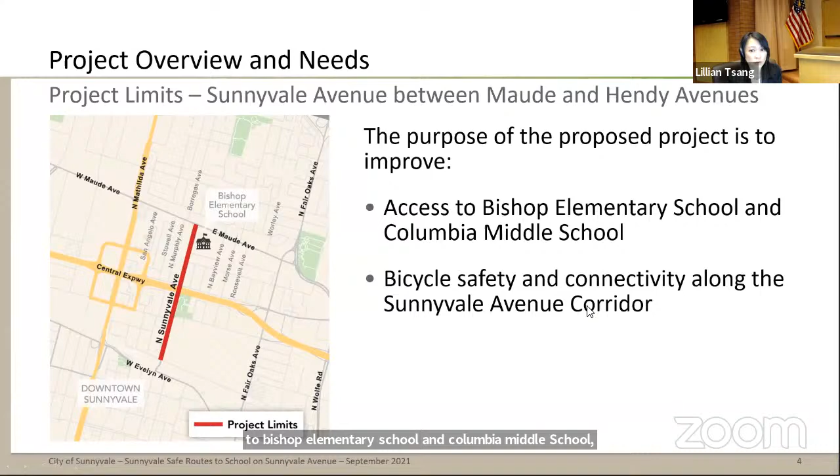This is an important corridor as it provides access to the Moffett Park area and the Bay Trail to the north, downtown and El Camino employment and retail area to the south, and it connects residential areas to Bishop Elementary School and Columbia Middle School.

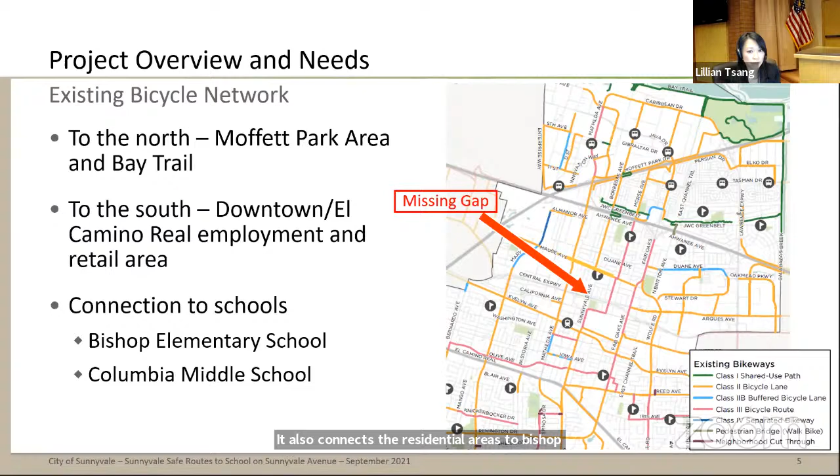As part of the analysis, we also reviewed the existing bicycling usage on Sunnyvale Avenue based on 2019 pre-pandemic data. During the AM and PM peak hours on a typical weekday, there were approximately 100 bicyclists traveling along Sunnyvale Avenue, both during AM peak hour and PM peak hour. Keep in mind that this was the usage observed with no existing bicycle facility on this corridor.

Mathilda Avenue does have an existing bicycle lane, and Fair Oaks Avenue is designated as a Class 3 bicycle route, a signed route where people biking share the road with vehicular traffic. It appears bicyclists choose Sunnyvale Avenue over Mathilda and Fair Oaks because Sunnyvale Avenue has a lower posted speed limit and less vehicular traffic along the corridor. In addition, it has a direct connection to downtown to the south, and there's an overcrossing on Borregas Avenue to the north, providing direct access to the area north of US 101.

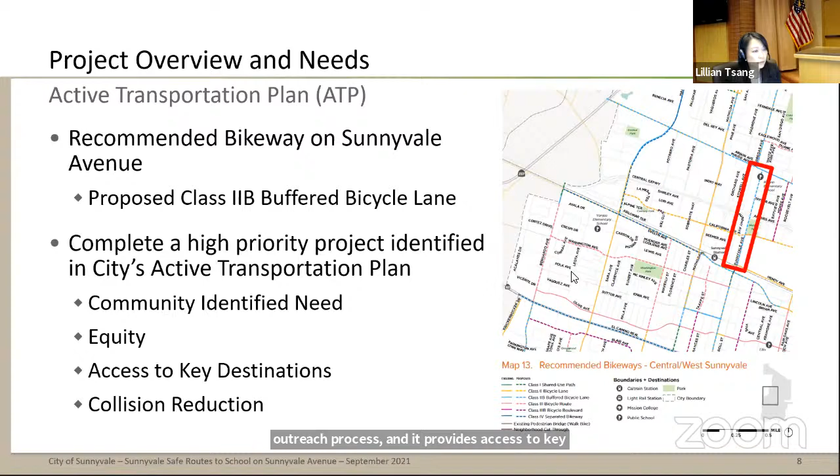A note is that for the segments of Sunnyvale Avenue between Hendy and California, parking is currently prohibited between 6 to 8 a.m. and 4 to 6 p.m. on weekdays. We collected data on 3 different weekdays in February of 2020. On each observation day, we collected data throughout the day at 11 a.m., 3 p.m., 8 p.m., and 1 a.m. to capture on-street parking usage throughout the day.

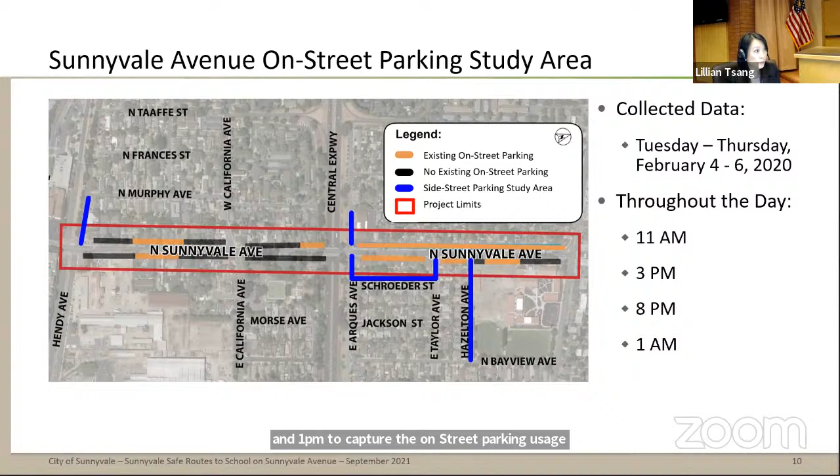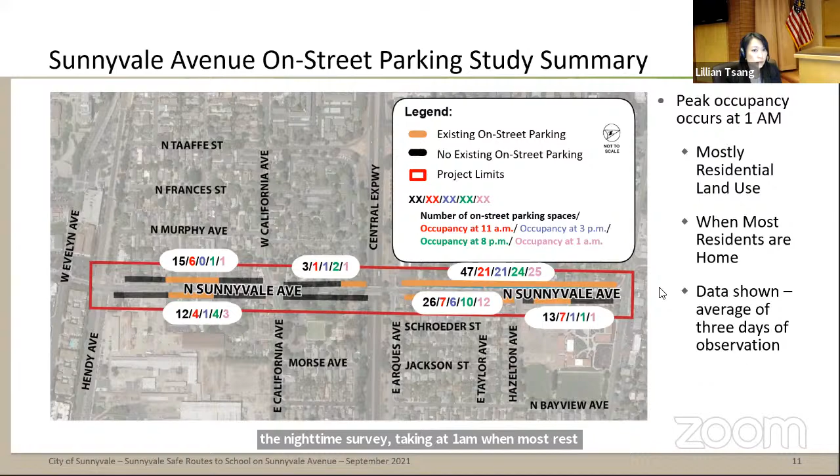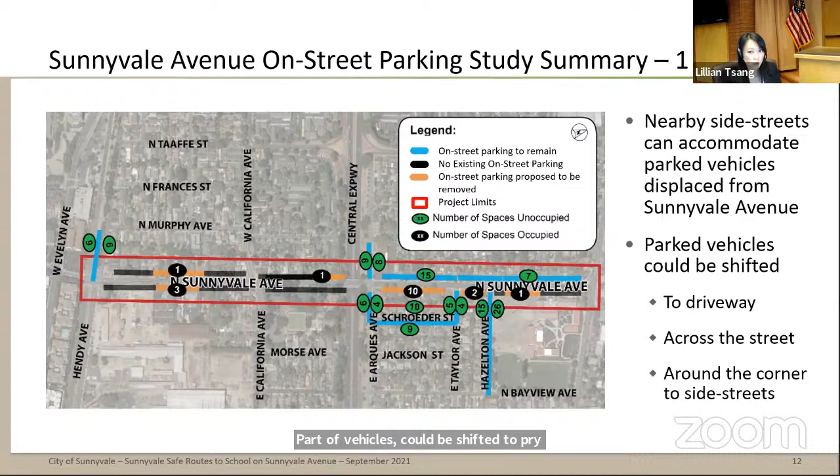The data shows that the nearby side streets and the west side of Sunnyvale Avenue between Arques and Maude Avenue have enough availability to accommodate parked vehicles displaced from Sunnyvale Avenue. Parked vehicles could be shifted to a private driveway across the street or around the corner to the side streets.

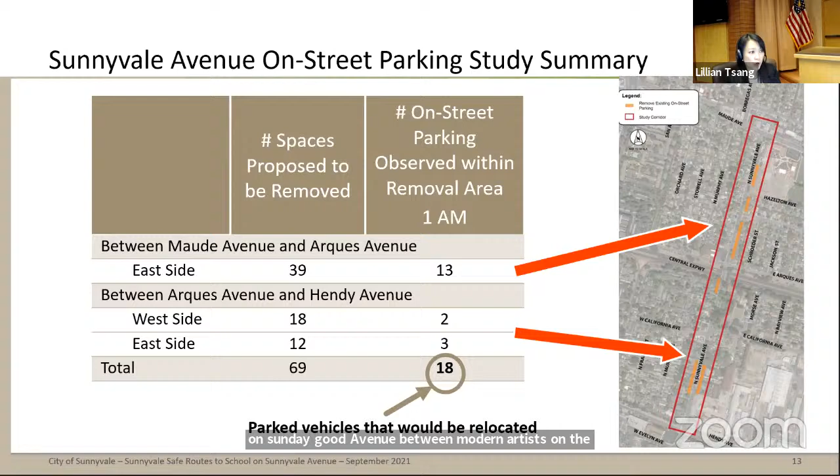Based on the data collected, we're proposing to remove a total of 69 spaces on Sunnyvale Avenue. Based on the data collected, a total of 18 parked vehicles would be impacted and would need to be relocated during the peak period at 1 a.m., of which 13 were observed on Sunnyvale Avenue between Maude and Arques on the northern segment of the project limits, and 5 were observed between Arques and Hendy, the southern segment.

Next, I'm going to present to you the proposed improvements we're envisioning on Sunnyvale Avenue as part of this project.

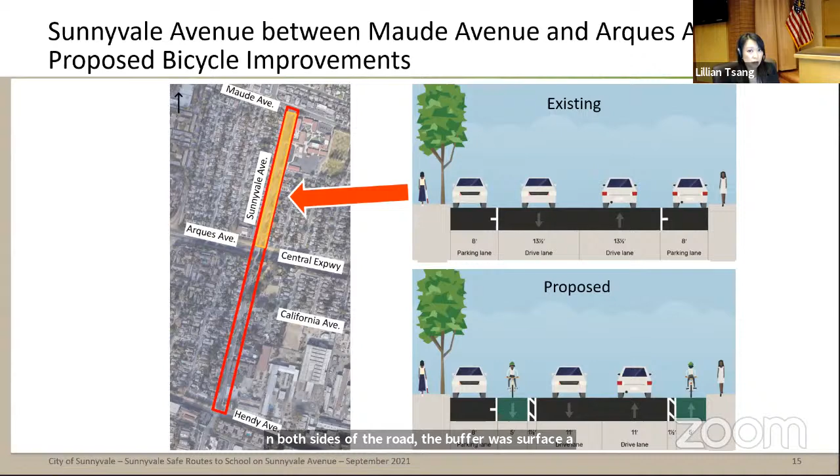What we're proposing is to remove on-street parking on the east side of the road while maintaining on-street parking on the west side. We're proposing to reallocate the roadway space and narrow the travel lane to install a buffered bike lane on both sides of the road. The buffer will serve as a separation between bicyclists and vehicular traffic, and the narrow travel lanes would guide drivers to travel slower to stay within the travel lane.

For the segment of Sunnyvale Avenue between Arques Avenue and Hendy Avenue, highlighted in orange on this figure, we also have 1 travel lane for each direction and on-street parking on both sides of the street. The total curb-to-curb width for this segment is a little narrower at 37 feet. For this segment, what we are proposing is to remove on-street parking on both sides of the road and reallocate the space to install buffered bike lanes on both sides of the street.

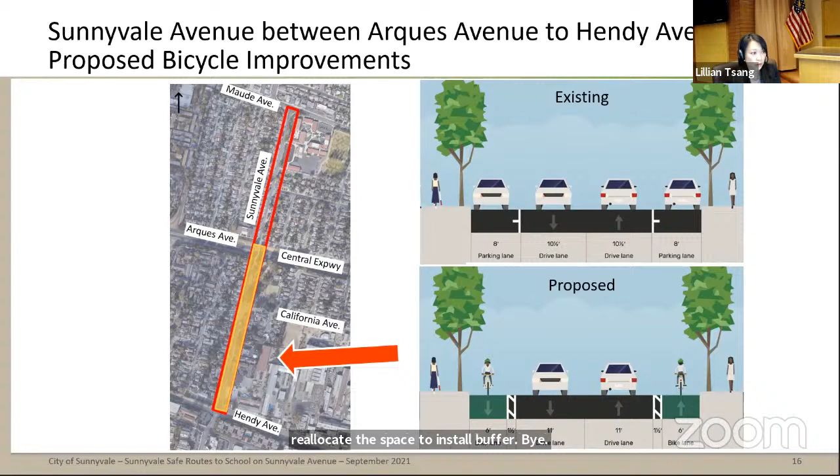Staff conducted a virtual public outreach meeting and hosted an online survey to obtain inputs from the public. Residents, property owners, and businesses near the project limits, shown in the yellow highlighted area on this figure, were notified of the meeting and the online survey via a mailer. The virtual public meeting was held on July 29th, and the online survey was available to the public for 3 weeks between July 12th and August 2nd of this year.

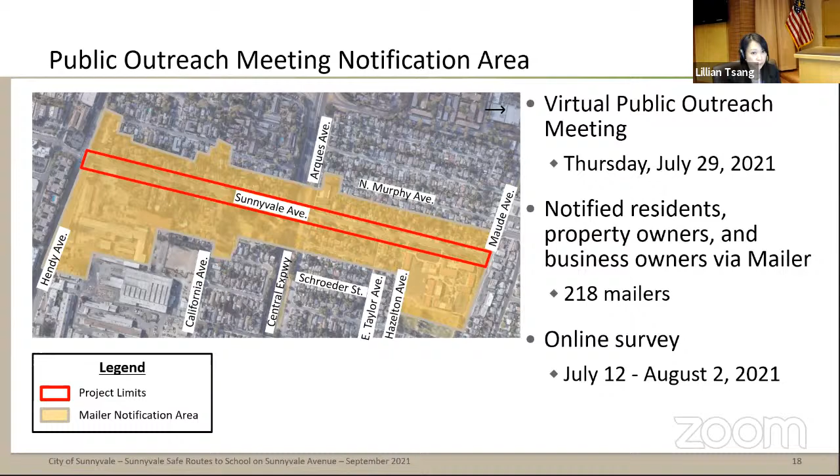There was a total of 16 members of the public who participated in the outreach meeting. Some of the major comments heard include some who expressed displeasure with the loss of on-street parking, some had concerns related to safety, convenience, and other personal factors, and some were enthusiastic about the project and voiced their support, focusing on the benefits it would bring.

On the online survey, there were a total of 179 responses. 41 of them indicated that they live on Sunnyvale Avenue. 36 respondents indicated that they do park on Sunnyvale Avenue. When asked why they park on Sunnyvale, we asked them to select all the choices that would apply to them. The top answers include visiting a friend or relative, no private parking at residence or it is occupied, and it is more convenient to park on the street.

When asked if they would bike more if buffered bike lanes were to be provided on Sunnyvale Avenue, 56% of the respondents indicated that they would. Out of the respondents who have children attending Bishop Elementary School, 44% of them indicated that they would consider letting their children bike to school with the new bike lane.

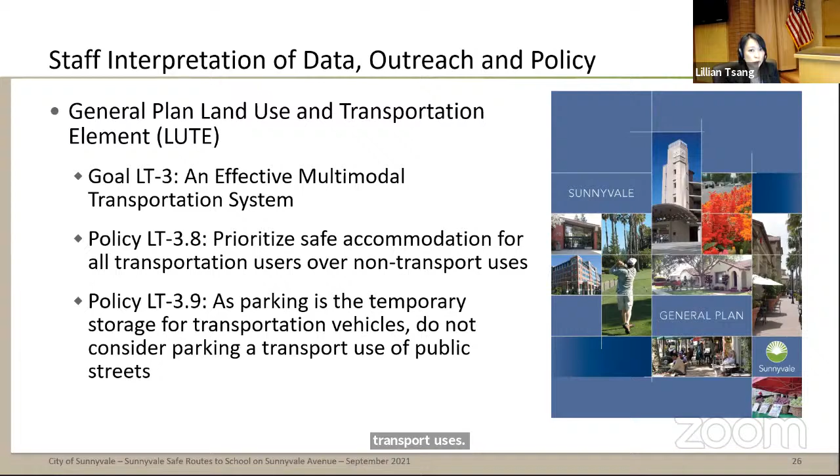From the Sunnyvale Active Transportation Plan, Sunnyvale is a complete streets community. Residents and commuters have a choice to bike and walk. Sunnyvale aims to provide a connected, comfortable, convenient, safe, and efficient network, and we aim to increase active transportation mode share to 10% by 2030. The Vision Zero Plan, adopted in 2019, calls for action to make Sunnyvale streets safer, especially for people biking and walking.

For this project, we're proposing to install dedicated buffered bicycle lanes, which are proven to improve safety and comfort for all users. The proposed improvement is a low-stress bicycle facility designed for all ages and abilities. From the Climate Action Playbook, also adopted in 2019, one of the goals is to reduce vehicle emissions and vehicle miles per person.

In summary, here are some of the benefits and concerns related to the proposed improvements. On the benefit side, the proposed improvements would close a gap in an already well-utilized bicycle corridor. It will provide people with additional options beyond driving a vehicle, and it will improve bicycle access to Bishop Elementary School and Columbia Middle School, connecting residential areas, El Camino Real, and downtown to Moffett Park and the Bay Trail.

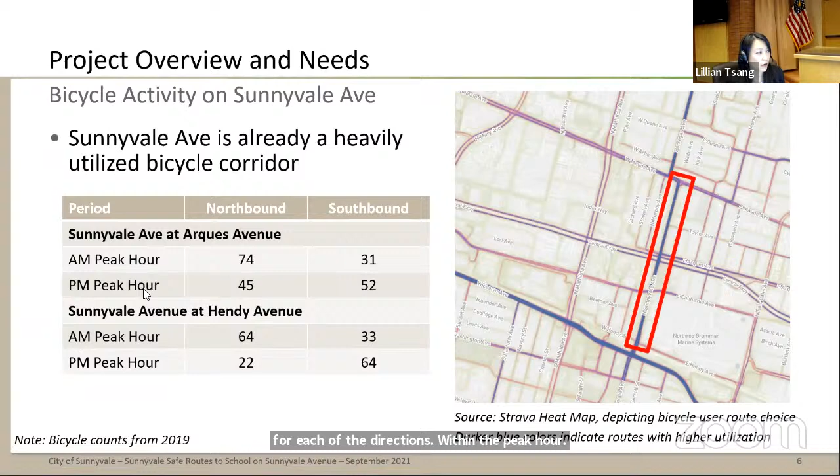Were there data gathered to count the total number of bicyclists over the course of one day? We did not collect that data at the time. Okay.

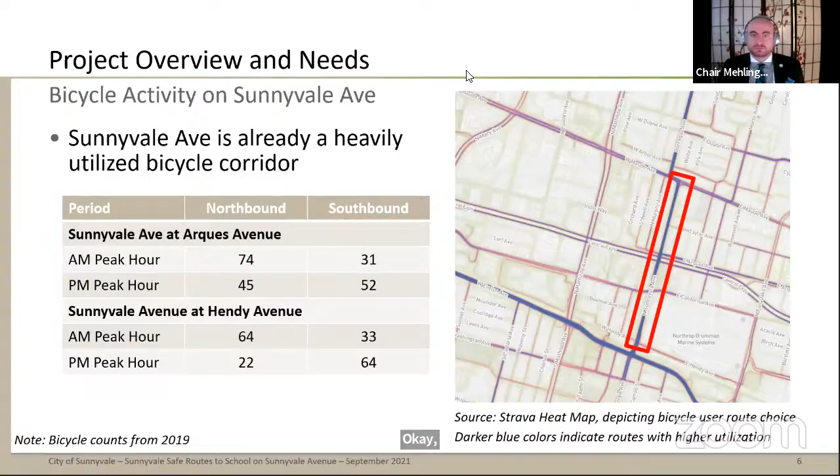On the parking studies, were any of the studies conducted during the day on a weekend? No, there wasn't. Usually we look at the typical weekday just to see what the typical conditions are, also because the majority of the land use along the corridor are residential homes. So we believe nighttime would be the peak for residential land use, because that's when most residents will be home. I asked because a lot of the comments that came through emails said there's a lot of parking on weekends because families get together, et cetera.

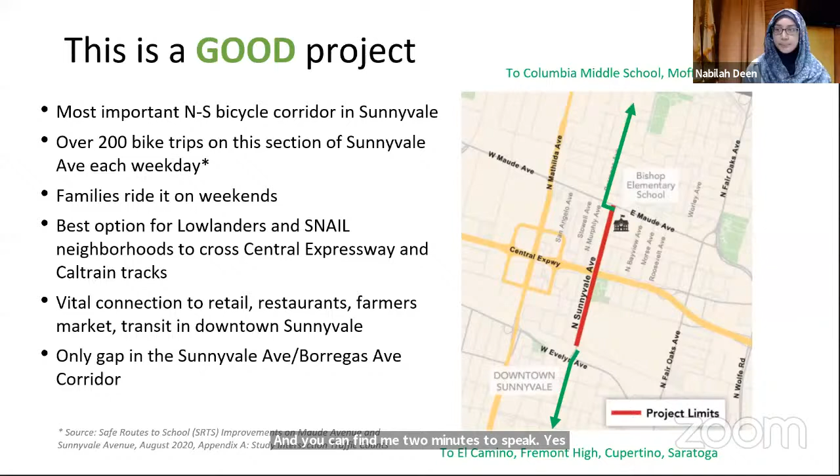This is a 2-minute or 3-minute presentation, so I'm going to try to condense it into 2. I live on a street adjacent to the project area. I have kids who walk and bike to Bishop and Columbia. My family walks, bikes, drives on Sunnyvale Avenue almost every day, and we think this is a good project. It's the most important north-south corridor in all of Sunnyvale.

The city already talked about the bike trips during commute hours. It's the best option for people living in Lowlanders and SNAIL neighborhoods to get to downtown Sunnyvale. And this 3/4 mile gap is the only gap in what is otherwise an 11-mile continuous bike lane from the Bay Trail all the way down to Saratoga.

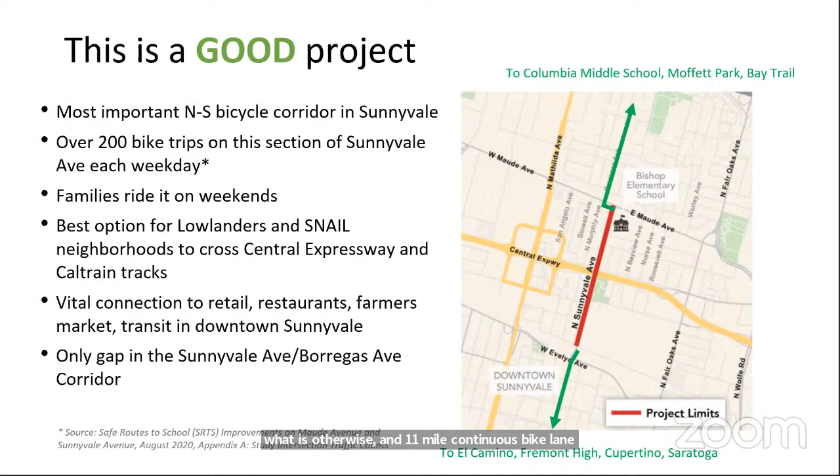Next slide, please. Biking on Sunnyvale Avenue is scary. If you want to do the video real quick, hopefully the sound is on. There you go. That's a dad that I saw riding with, I assume, his son, and a car driving past very fast, having to go over the double yellow line. It's really scary to bike on Sunnyvale Avenue, particularly with kids.

Drivers speed. If you ride next to parked cars, your risk of getting doored. And the VTA buses and trucks have to pass really quickly. There's been recorded bike and ped crashes there. One way to solve this problem is to put bike lanes in. You can go to the next slide.

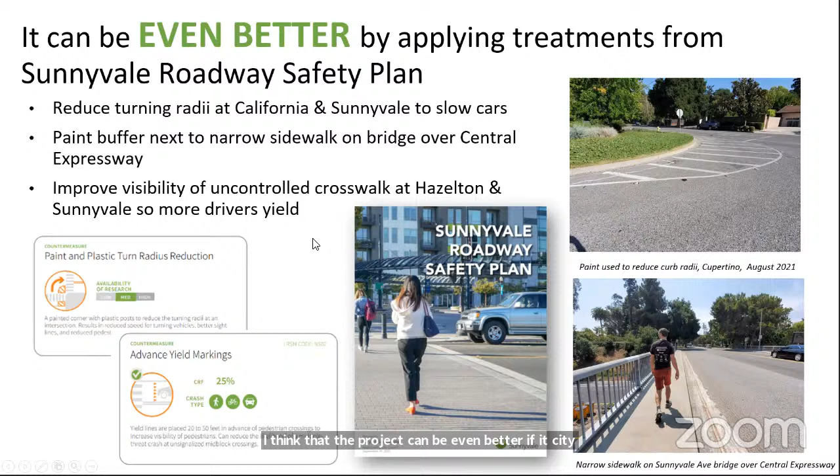I think that the project can be even better if the city applies treatments from its roadway safety plan for pedestrians. A few of them are noted here. You can go to the next slide. You have 30 seconds left. I'm going to skip this slide, go to the next slide.

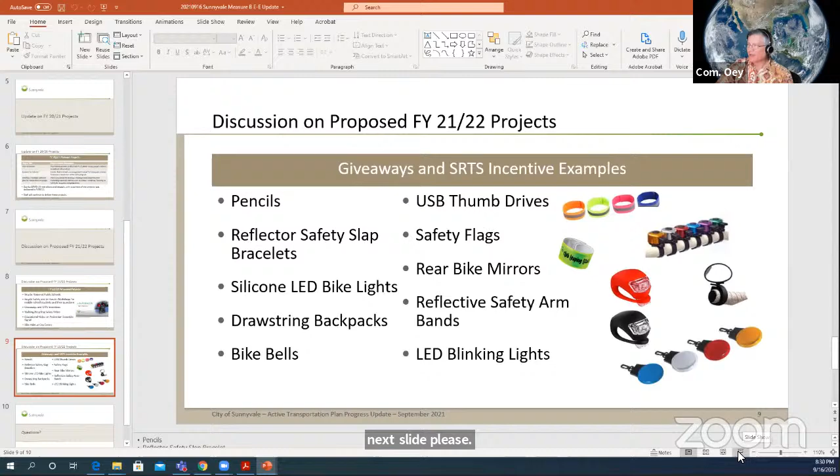Now, the one thing that I would avoid is these disposable bike lights. They're really cheap, they don't work very well, you have to throw them out very quickly. If you're going to do lights, make them a prize or something and do a quality light, a rechargeable light that really actually works and is not just a gimmicky thing that's going to get tossed and doesn't last very long. So do stuff that can last a long time.

So the safety bands or the reflectorized stuff that you could just use again and again and again. I mean, they're fairly inexpensive. You could also consider safety vests, which aren't particularly stylish, but they are extremely visible. And if you make maybe a cool logo or normalize it, then we get very visible people out there biking.

As a regular bike commuter, I do wear my safety vest all the time. I want to make sure that drivers have no excuse for not seeing me because I'm just sticking out like a sore thumb, so they say, I'm going to avoid that person. So I know that they aren't stylish for a lot of kids, but maybe we could do something to make them a new fashion thing.

But it's stuff that is durable and reusable and doesn't have toxic waste that gets just tossed, like those little lights, they're probably the worst. And like a fun reflector, reflectors are very durable and they last a long time and you can attach them to stuff and they're cool.

And good quality. Also if you do look at bells, do get good quality ones, reasonable quality ones. Some of them have these plastic straps that just break and they don't stay on very well. That's another hard ask, to find a good bell. The nice ones are expensive, but they sound great though, the nice ones. And maybe those could also be a prize that people are like, oh, now that's a really cool bell and I want to win that prize by doing something.